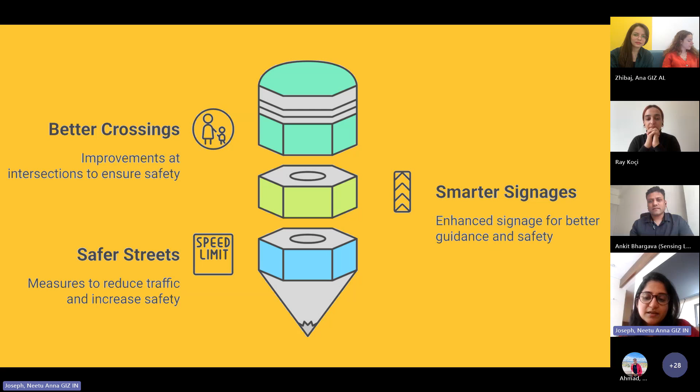We are here to explore how small changes like better crossings, smarter signages, and safer streets can make a difference in how children experience their daily commute. So what exactly is SRTS, or Safe Routes to School? It's a global initiative to promote safe, convenient, and active transportation, and focuses on improving pedestrian and cyclist safety, reduce traffic congestion, and enhance community health and well-being. But it also does kickstart a cyclical loop where promoting active transportation improves health, reduces congestion, builds in a sense of community, and has also been proven to improve academic performances in children.

Any of you who have heard of SRTS or are familiar with the concept of SRTS would have heard of the 5 E's of Safe Routes to School, which provide a comprehensive framework for making school journeys safer and encourage walking and cycling. So these 5 E's are education, encouragement, enforcement, evaluation, and engineering. While evaluation and engineering are often prioritized, the other 3 E's are neglected. But it's essentially these 3 E's that can help bring about a behavioral change and a possible shift to sustainable transport modes.

Our work in Bangalore goes to emphasize that overall project development is what will lead to successful implementation of SRTS. So we've broken down the project into 2 parts. Part A, where we developed a toolkit called RASTE, which is the Kannada word for streets, and an acronym for reimagining active school transit experiences. And part B, which focuses on evaluation and engineering interventions at the street level. So I'll quickly take you through what RASTE is all about.

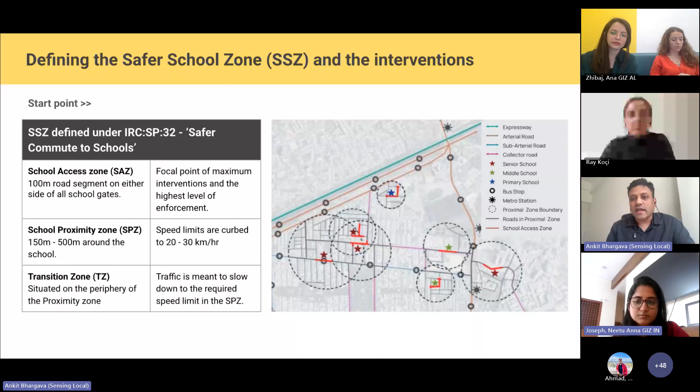This is followed by the school proximity zone, which is just outside it, 150 meters to 500 meters, where we are hoping to really limit the vehicular speeds. And then there is a transition zone, which is the zone for vehicles to slow down before they enter the school proximity zone. So these are the three zones that IRC has defined. And this is a really good starting point for us to understand what it means to create a safe access zone around the school.

So this is something that has really come out of the work in Malleshwaram. And what you will constantly see is at the bottom of the screen, I've also highlighted the gaps that we found along the process. This slide puts together all of those interventions for the school access zone. So just the 100 meters in front of the school. This is again something that we were really missing in the guidelines.

The guidelines often spoke of interventions in isolation. So they just said, oh, you need to have signage, you need to have crossing, you need to put this. But it never really put together an imagination of what a safe school precinct could look like. And so we've really done that, which is to say, what does a model plan look like? And this is a great exercise to communicate as well to different stakeholders that this is what we're expecting to do before we go and audit what is on ground. So this is again addressing a very real gap that we found.

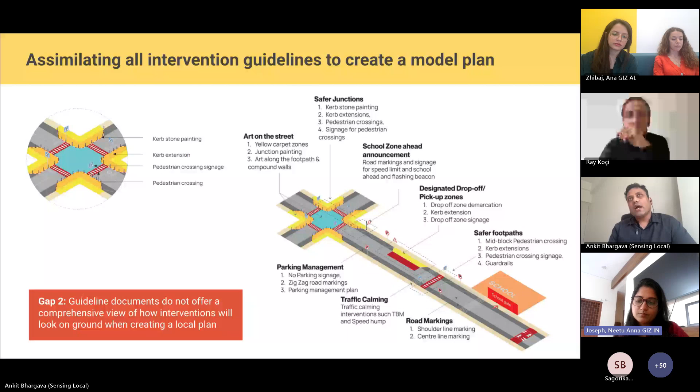Once we had clarified what kind of interventions we wanted, we also went about creating a very extensive but easy to use audit form. And again, this is something that we were really lacking in the context of India and Bangalore, where none of the templatized audits were available.

So as part of this project, we've also created templates that anybody can use, especially in our context, and whether it's a school child or a traffic police or a community group, can just go on a junction and check box whether there's a crossing or not, whether there's signage or not, whether there's a speed hump or not.

And what is so nice about this is that in order to really succeed at scale, we really need to get children involved. And to do that, you have to really simplify this exercise. So we've really made sure that we design it in such a way that anybody can go and audit their junctions for safety and the nature of infrastructure that's present. So this is largely the work that was being done in order to understand the structure of the project.

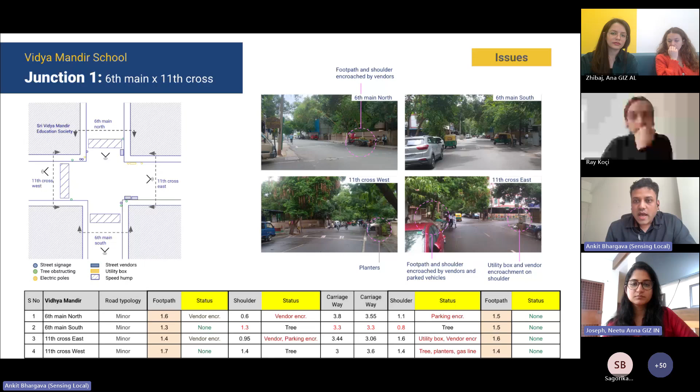were mapped. We also did extensive measurements of the footpath, the shoulder area, whether it's encroached or not, whether it's a vendor encroachment, tree encroachment, what the carriageway widths are, all of that, and the footpath width. So the section is extremely detailed in the documentation process. And this really helps us understand what we need to do in order to create a safer road, but also safer footpath. And then we put this again on an online map just to contemplate, to say, okay, what might be the safe school plan here?

And we went on ground with the government to then say, okay, this is what we want to do. What do you think? And they evaluated this on ground. And after that evaluation, we created, again, technical drawings, which were reassessing the carriageway width. Sometimes you're normalizing carriageway widths. The shoulder lines are not clear. So everything between the shoulder and the footpath is absolutely unclear. So we need to really demarcate what is a curb, what is a footpath, what is a carriageway. And oftentimes we are also reducing carriageways, which are otherwise very extensive.

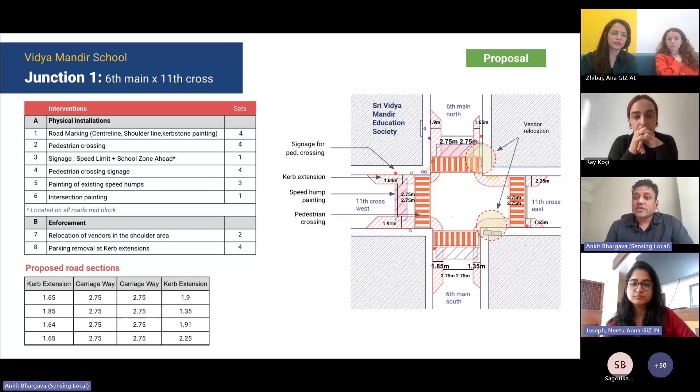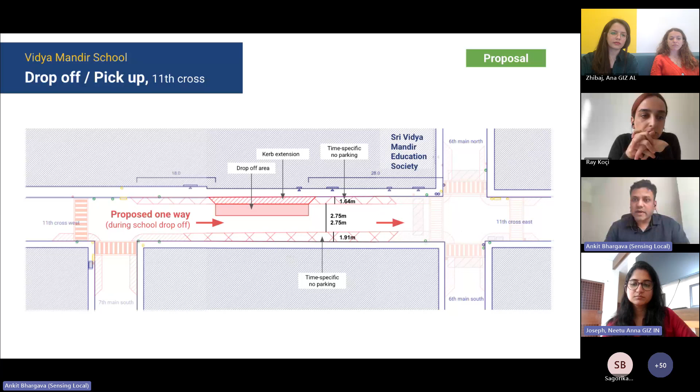This is the drop-off and pickup zone. So really understanding which is the no parking area, where should the vehicles which will come in to drop the kids be located? How do we need to signify them on ground? Where is the painted area where they can pause versus where the queue up will happen? Yeah, so all of these are the kind of interventions. I do have a few renders to show you what a before-after is.

I can stop and dwell on anything based on what you think, Neetu. But the last slide, which I wanted to leave us with, is a safe school zone plan can be created by a school or a municipality. We often imagine that the governments have to lead everything, but that's not true. Schools can lead it as well. But what we realized is that all of the different stakeholders, which is the school, the community groups, the traffic police, and the municipality, all need to work together regardless of who initiates it.

And so this kind of an exercise should be done in any city by themselves to say who is going to initiate it and then what are the different roles. Because otherwise, if expectations are not clear, we will always end up in failure. And this way, we always know who is going to nudge, how do we follow up, where pressure systems need to be applied, etc.

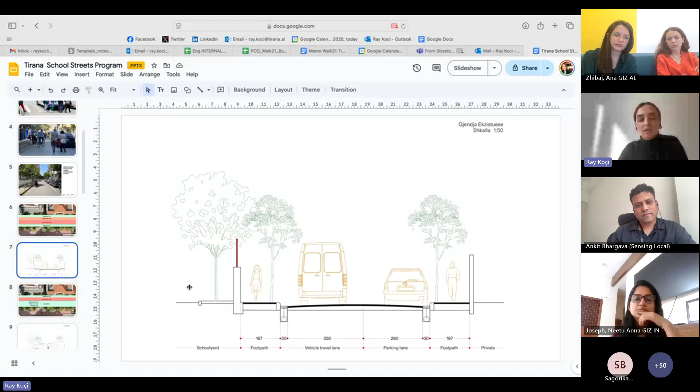So going further, we try to reclaim that parking lane, as I said, build a bigger sidewalk which is comfortable, of at least 4 meters, that allows for all those activities that were also mentioned in the video. And we try to come up with the street looking like this. So basically the space is redistributed for people this time.

This new 4-meter sidewalk offers space for people to sit, for new shade, for people to walk freely, and also for furniture or barriers that will protect this pedestrian space from vehicle invasion, basically. So the street looked like this.

How we start this process is by throwing a party there. Why, you say? Because throwing a party and showing the decision makers how much fun this is and how a street could look if there are more people, more laughter, more kids in it, has been very crucial in putting this program forward. And then the construction process begins with the city workers, which has been a key component of this program.

Basically, partners, Qendra Marrëdhënie in this case, the local NGO, provide the design input, and then the city commits to building the street with free labor, basically, and by using materials that they have in their maintenance department, which is key to the ongoing maintenance and to achieving cheap projects that don't require a lot of resources, but that can be built and replicated easily.

And this is what we get after we have those extra 3 meters added to the sidewalk. Basically, we get the freedom to get out of school, meet our grandpa, meet our dad, run to them, hang out with our bike, park our bike in the new school street, and a calm street that allows for passing traffic, but with limited speed because of the narrow lane that we have now. And a calm, relaxed, joyful and entertaining space for pedestrians and the younger kids.

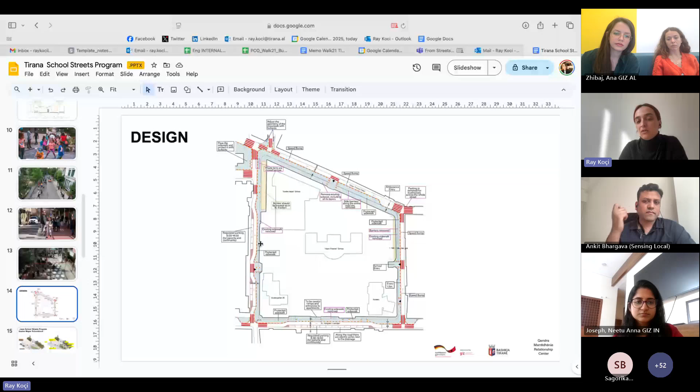So to look back once more at the anatomy of the school street, we look for streets that have a parking lane, which is what we can sacrifice and reclaim for kids and for pedestrians, sidewalks that are limited, barriers. So basically, this is the existing situation that we're looking for. And then we move on to improve it with reclaimed space, a narrower travel lane that ranges from 2.8 to 3 meters, increased space for pedestrians and kids, elements like paint that can be implemented or developed with the kids and the community members. Seating is super important, new trees, play features or anything.

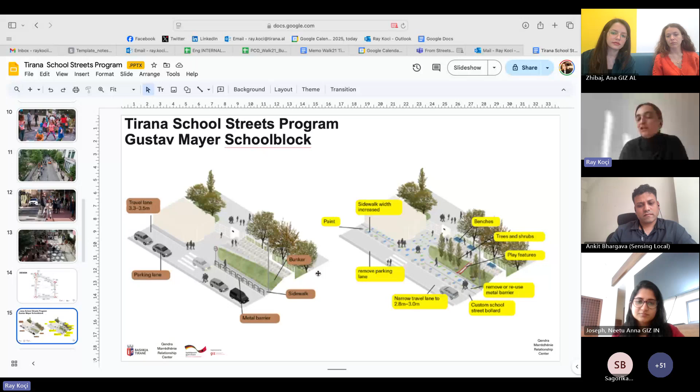So basically, space that can offer, and you don't necessarily need to include new play elements in the street, because as we know, kids can also play just in dirt or with branches or with leaves from the trees that are present in the street.

This has smoothed their process too. They don't need to open the main gate. There's no need for all the parents of all age groups together at that same door at the same time. So basically, this is a new use of space that came up just because we expanded it, and that's it. So the school had now found a platform to make changes to their daily operations.

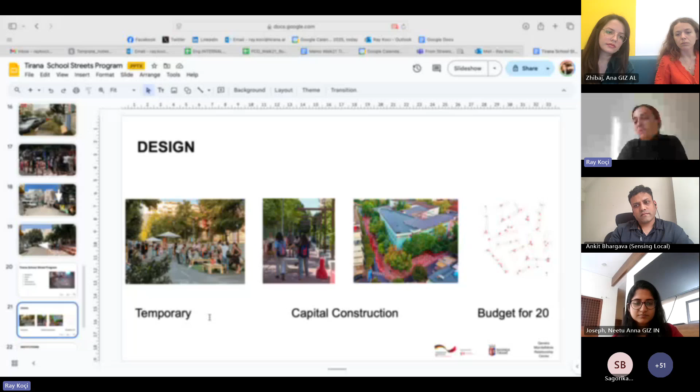Again, this is what I just explained right now. So our process has been a temporary or pop-up street party, capital construction, and now immediate or simultaneous construction of 20 more, which is really what I was talking about in that video before, that what we want is that the capacities are built within the city and they're able to build more of it at the same time, so that the impact is bigger and simultaneous at the city level.

And to finalize with a Walk 21 conference that we're organizing in close partnership with GIZ and hosting together. This is actually also a call for you guys to come to Tirana in October, where we will be together with many policymakers, experts, people from the world of walking, cycling, and good public space design, to discuss projects like this one that could be also a great stepping stone for the region that we represent here. So thank you, and you are welcome to Tirana.